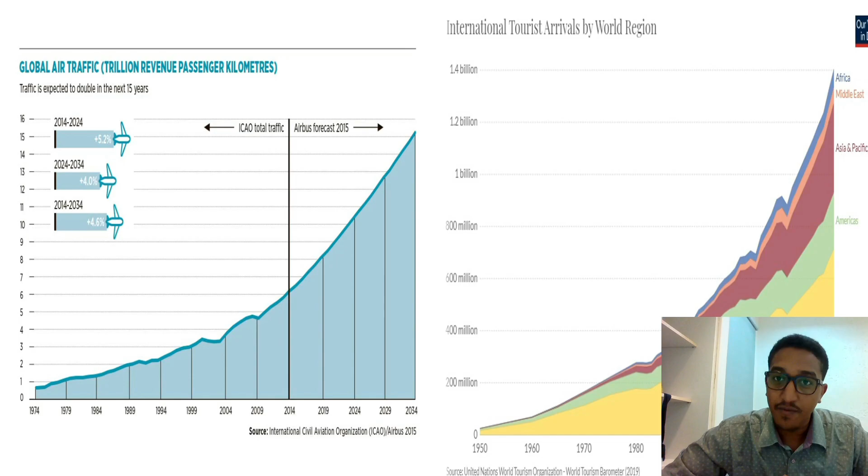With the continuous development of these technologies, the number of air travelers, as shown in the graph on your right hand, had constantly kept on increasing year by year, which generates tremendous amount of revenue for airlines and aircraft manufacturers.

Due to the increase in demand, in the past decades aircraft manufacturers had witnessed a huge number of aircraft orderings from different varieties, from small, medium, and even the jumbo jets.

However, did you know there are other interesting ways where the impact of aircraft on the environment can be mitigated aside from engines? Well, we will explore these ways through the presentation. Therefore, lend me your attention and let's dig in.

Despite the pandemic and its negative impact on the air transport business, the International Air Transport Association had published a statistical estimate that air travel industry is going to increase rapidly, where the number of air travelers one year after the recovery from the pandemic is going to surpass the highest peak achieved in 2019. Therefore, we need to utilize the time to improve our air travel means, which are aircrafts.

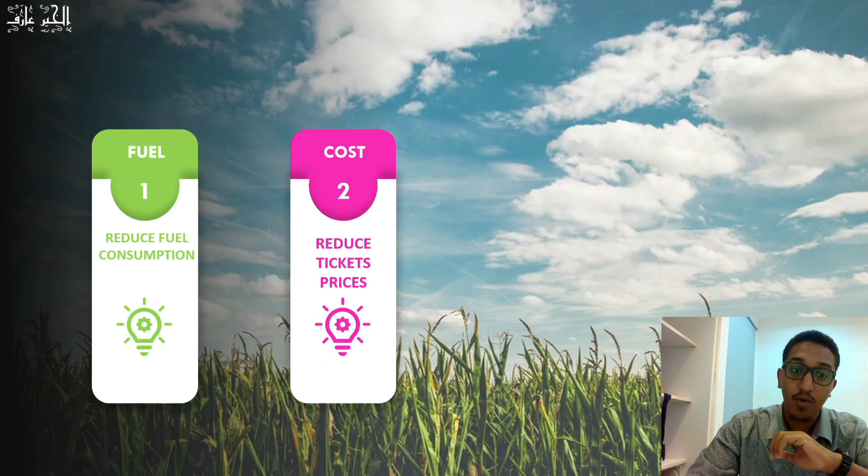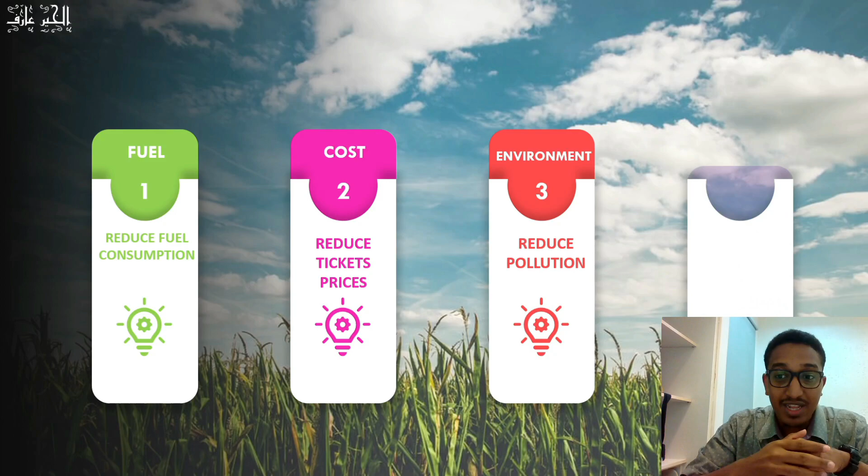Less use of power reflects in less fuel burned. Moreover, reduction in fuel burn saves fuel. Saving fuel will have a direct impact on the cost. Therefore, airfare tickets are going to be reduced. And most importantly, the aircrafts are going to be more environmentally friendly. Last but not least, we are introducing a new mechanism to aircrafts that was not possible before.

But before we dig in more into the topic, let me ask you a question. Which part of the airplane lifts it from the ground? Is it the engine? Yes, it's the engine. What about the wing? Yep. Basically, the engine and the wing work together in order to lift the aeroplane.

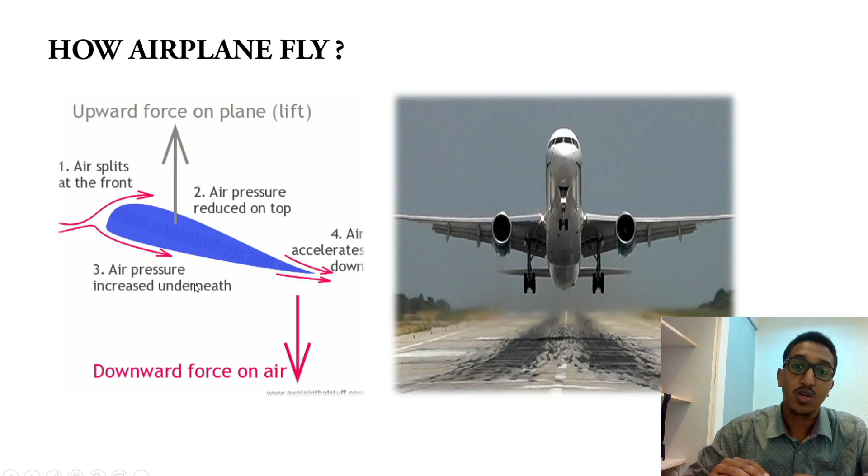The engine provides the force and the velocity that drives the airplane forward. The wing creates a variation of pressure between the top of the wing and the bottom of the wing. The variation of pressure causes the aeroplane to fly.

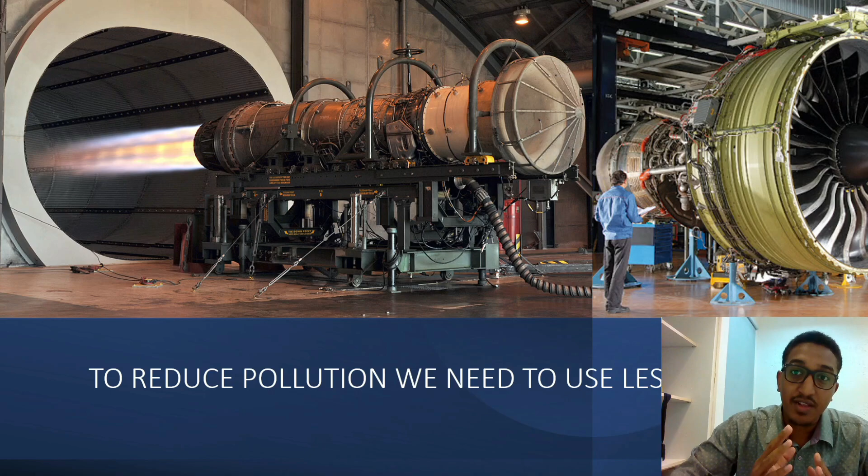To reduce pollution, we definitely need to use less power. Therefore, high efficiency and more environmentally friendly engines are required. But also, we need aerodynamic enhancement on the body of aircrafts, which also plays an important role to achieve the aircraft enhancement goals in terms of efficiency and environmental impact.

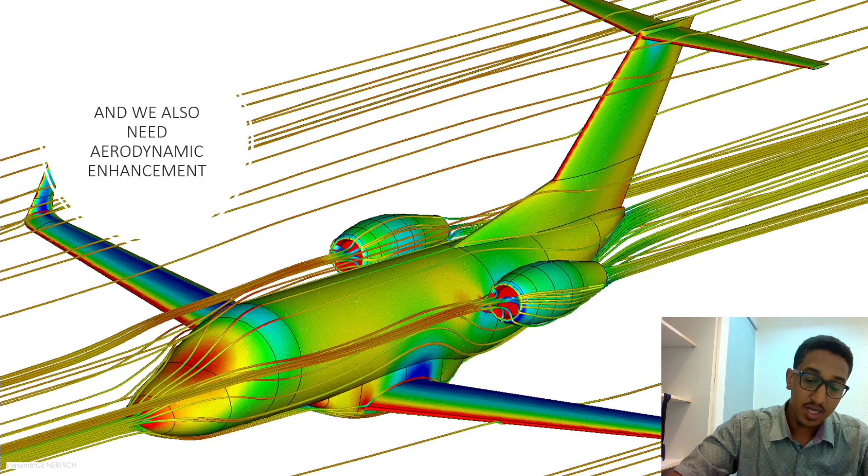In this research, a simple airfoil was constructed with a few enhancements. We added a suction area in the leading edge of the airfoil, and then a blowing area at the back of the airfoil. The suction area draws air into the wing, and then the air is blown out at the back of the airfoil, referred to with the orange arrow.

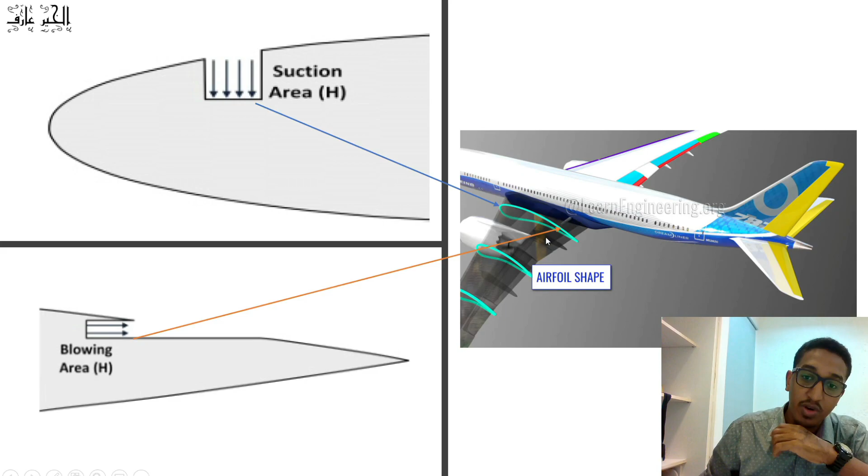We believe those minor changes in the aircraft would enhance and optimize the flying characteristics based on the research published. SolidWorks was utilized to model a small aircraft, basically a replica of the Cessna 172, and we fitted the wing with the new proposed geometries.

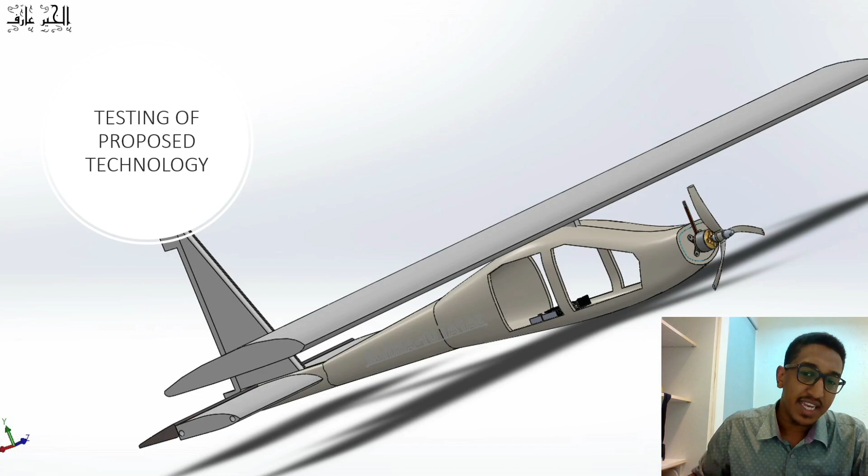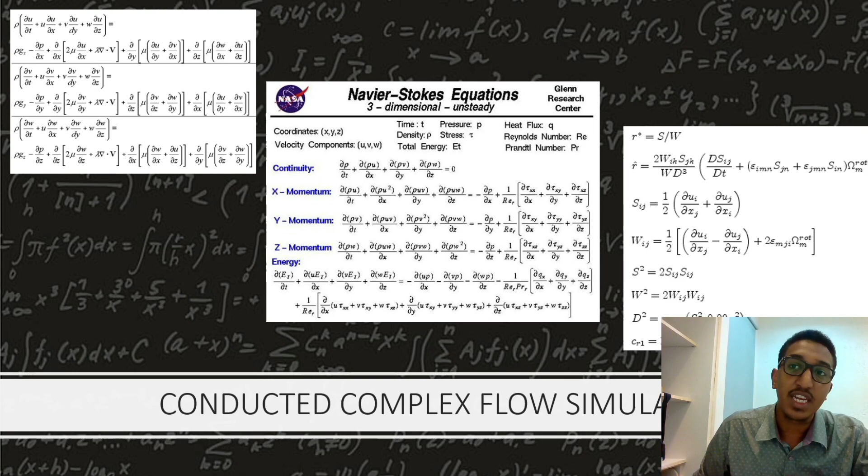The necessary flow simulation equations, like the Navier-Stokes equation, the kinetic turbulent model, etc., along with the boundary conditions and the fluid properties of air, were written in a flow simulation software called ANSYS Fluent. Then the simulation was run for 24 hours. Later, we got the results.

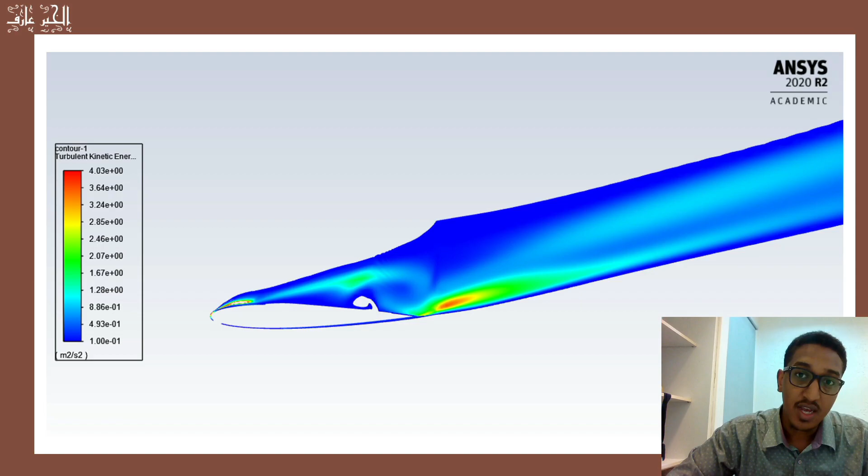The simulation contour results clearly illustrated that suction and blowing have a direct impact on the flow characteristics of air around the wing. The figure shows the difference when the suction geometry is opened and air is allowed to enter, and when it is closed and air flows like a normal wing.

When the suction geometry is opened, a kind of turbulence is generated at the leading edge of the airfoil. This turbulence at the front of the airfoil causes the aeroplane to slow down at a rapid pace. Comparing to the no suction zone, you can see a green area at the leading edge, which emphasizes that there is a relatively low amount of turbulence in the front.

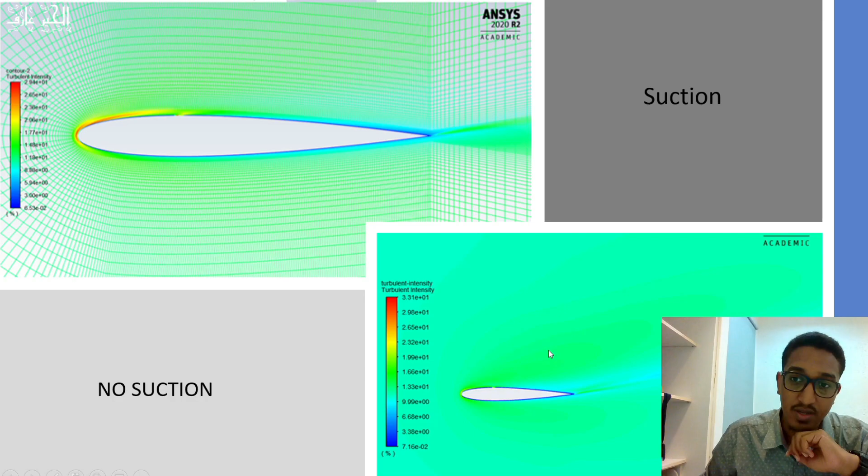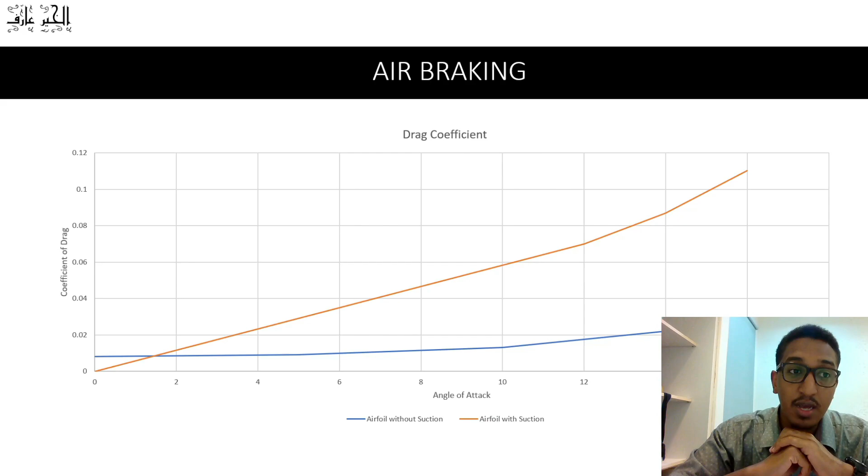The graph visualizes the change in drag coefficient, which slows down the aircraft using the drag force, a force that opposes the forward motion of the aircraft. For the conventional wing, represented by the blue line, at the highest angle of attack of 16, the drag coefficient is 0.02, whereas when the suction geometry is opened, the drag coefficient increases all the way to 0.11. This increase in the drag coefficient provides the aeroplane with a new proposed mechanism, which is air braking.

But then you might tell me, wait, aeroplanes have brakes. Well yes, you're right, they have brakes called spoilers, but they are only usable when the aeroplane is on the ground, as using spoilers mid-air will cause stalling of the aircraft - a sudden change of pressure around the wing which causes the airplane to nosedive or fall from the sky, resulting in catastrophic results.

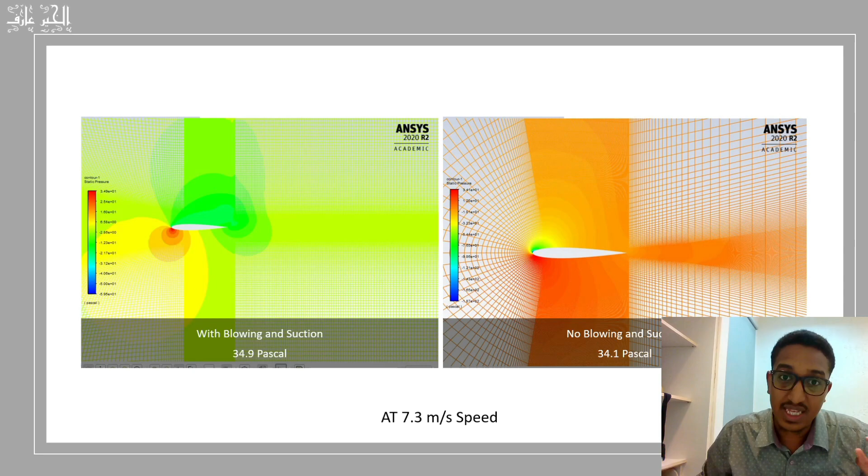On the other hand, the blowing geometry had an effect on the pressure below the wings. The figure of the wing with blowing and suction geometry recorded a pressure at the bottom of 34.9 compared to 34.1 for the conventional wing. This variation of pressure, recorded to be higher at the new proposed wing, due to the introduction of the blowing geometry, resulted in an increase in the lift coefficient, which is responsible for lifting the aircraft to the sky with minimum power.

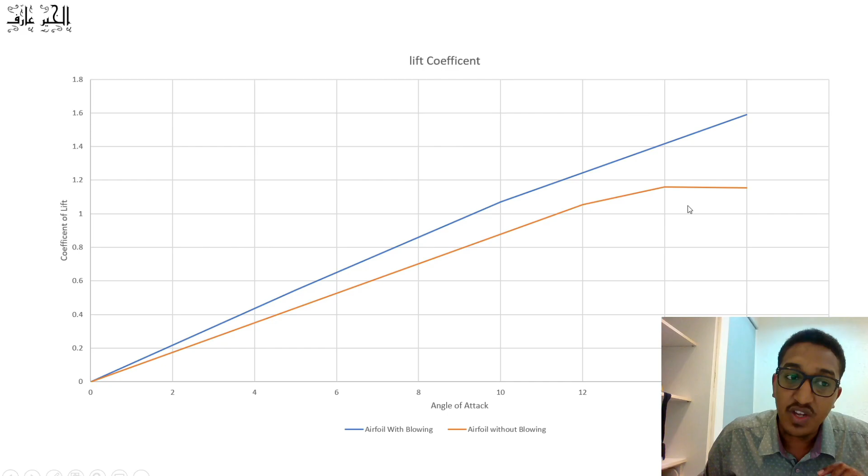The graph shows the conventional wing lift coefficient, recorded to be 1.18, and after the introduction of the blowing geometry, the lift coefficient increased all the way to 1.6. This increment in the lift coefficient increased the payload of the aircraft by 9.8%. Not only that, but it also reduced fuel consumption by 7.5%.

The health of our sons and daughters lies between our hands. Damaging the environment is indirectly killing our next generations. It is our responsibility to provide the newer generations with a clean and healthy environment in order for them to achieve their life goals. We should strive to reduce pollution as much as possible, as we cannot compensate our health with wealth. Ladies and gentlemen, we are from different backgrounds - engineers, scientists, lecturers, etc.

But if there is a takeaway from this presentation, I hope despite our diverse professional backgrounds, we can all contribute to keep our planet Earth green and clean in our own ways. With that, I end my presentation and thank you very much.